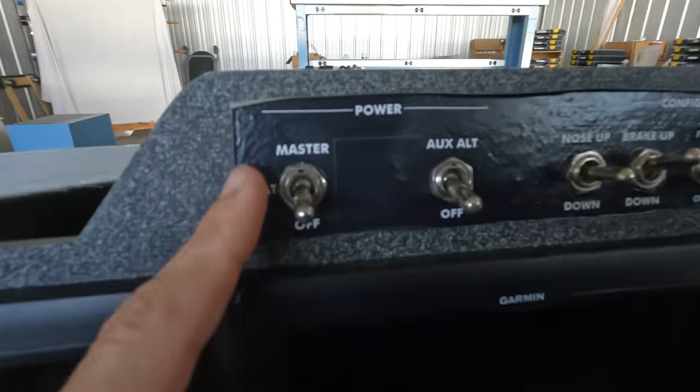Another option you have is to get with a local sign shop and design yourself some vinyl stick-on to add graphics to your panel. This is what I did 5 years ago, and it worked okay. The problem is that vinyl stuff isn't designed to last longer than a few years. Mine started peeling up at the edge, and it started to look pretty rough. Also, when I went to change the design, it was easier just to print with a label maker. So then I had this mismatch of duct tape, label maker, curling up vinyl graphics.

Gross. Okay. Another option you have, obviously, is to use a label maker. These are nice. It's inexpensive. It's easy to iterate. The labels are surprisingly durable. I've had those labels in a hot cockpit for over 5 years, and they look just like I put them in. They look like trash, but they still look just like I put them in.

So the downside with those is that they don't look good, and passengers, I think, kind of get an idea for what their experience is about to be based on how well your aircraft looks. You know what I'm saying? Aesthetics matter to the extent that you want your passengers to feel safe and secure, and that they didn't just get into an experimental race plane that some guy just built in his garage. I mean, that's the truth, but if you polished it up a little bit, then maybe they wouldn't think that.

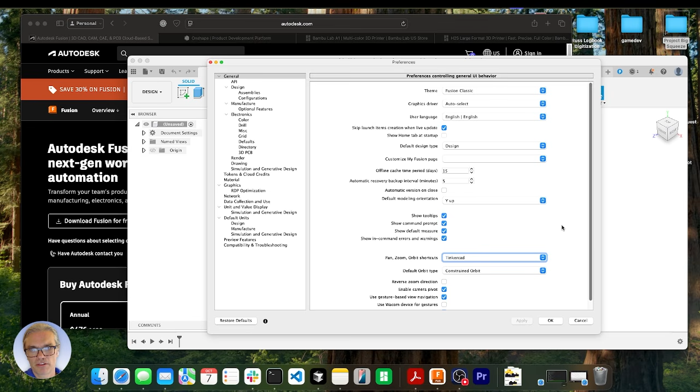Oh, what's the name of it? Bambu Studio, the thing that we're going to use to input our 3D file into the printer. So change this to Tinkercad, hit OK.

All right, so what we're looking at here is we are currently in the 3D space. There's nothing to look at, so let's go ahead and create an object, and then I'll show you the rest of the UI. Everything in CAD is basically a two-step process.

Step one is to create a sketch, like a 2D sketch. We're just going to draw a shape onto a 2D surface. Then we are going to what they call extrude the surface of that 2D shape into some 3D dimension. If that's confusing, don't worry, it'll make a lot of sense here in a second.

So on the bar on top, right here where it says create sketch, we're going to click that. Okay, and so now what it's showing us is the three different dimensions that we have to work with here. Green is vertical, red is X, and blue is out of the page, so that's Z.

We are currently looking at our work surface from the front right top side, okay? So this is the view cube. It sort of gives us an orientation in space for how we're looking at the X, Y, and Z origin point.

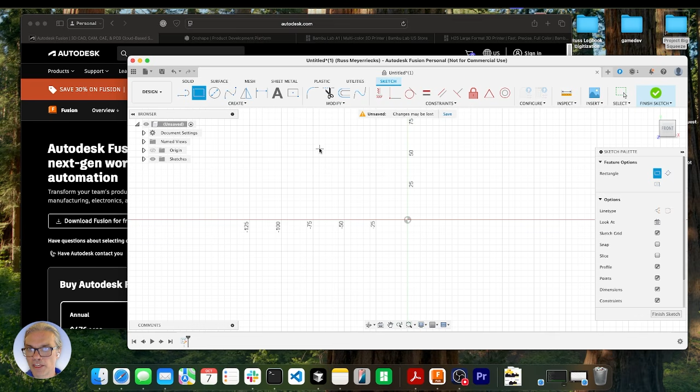So what I'm going to do here is just draw a quick rectangle. I'll click on the rectangle button, click once to start the rectangle, and then click a second time to stop the rectangle. I think that's good for now, and then we'll go ahead and click Finish Sketch.

Now, when you do that, it brings you back out from the 2D sketch space to the 3D space, okay? And it reoriented your view to the home view, which is that same view we had earlier, sort of halfway between front, right side, and top side. So you can click this little home thing and it always brings you back.

Now, if you click front, it puts you front and center, because that's how we had aligned our original sketch. Okay, this is the square that we drew. So I'm going to go back to the home view.

Now here's the second step for CAD. The second step is to extrude the surface that you just created from the sketch. So here's the extrude button in the top left, I'm going to click that. It auto selects the surface because it just kind of figures out what we're working with, and then it asks us what distance we want to extrude that surface to.

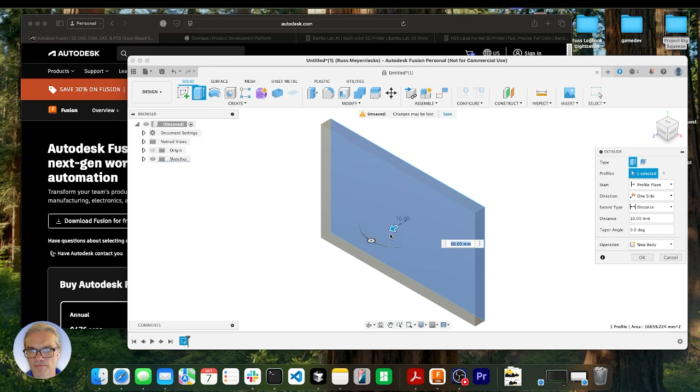So instead of entering a distance, I'm just going to grab this arrow and drag it out. See how we can make it thicker or thinner, easy peasy. We're just going to make it 10 millimeters for now, hit OK, and look at that, we have a 3D object that we created from a sketch and then extruded.

Pretty easy. Now if we hold down the right mouse button, we go into an orbit mode and we can orbit around the part. We kind of have to catch the shadows here so we see where our angles are, but see how the view cube in the upper right hand corner is orbiting with us? This is a good way to move your viewpoint if you wanted to see something very specific. Now I let go of the right mouse button.

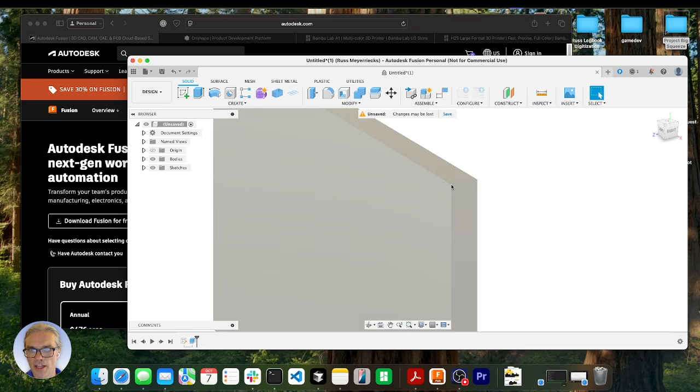And then another thing I can do is use the scroll wheel to scroll in and out, that zooms us in and out, okay? So right click to orbit, scroll wheel to scroll in and out.

Now that we have something on the screen to talk about, let's review the rest of the interface here. An important drop down on the browser on the left-hand side is sketches. The Sketch1 is the original sketch that we created earlier. Now, you see how there's an eyeball here, but it's X'd out?

When you consume a sketch for an extrude, the program will hide that sketch from you. You can do multiple extrudes from a single sketch, but you'll need to come in here and unhide it so you can select different surfaces to do more extrudes.

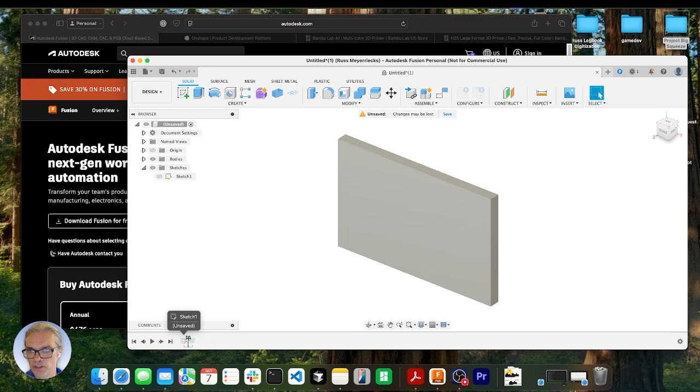Another thing to look at is down here on the left - this is the history. It shows that it started with a sketch, then we did an extrude, and any other operations will continue on to the right. You can grab this little marker and undo the past few operations, like if you needed to go back a step and change something.

But it's even smarter than that. Check this out - if I go back to our original sketch and double click it, it brings us back to our original sketch. Let me make a slight modification to this sketch.

I want to add a fillet to one corner. I'm going to click the fillet tool here, and then define two surfaces on which it is going to fillet. Now it wants to know the radius of the fillet arc. I'm going to give it a big arc here, just so it's really obvious.

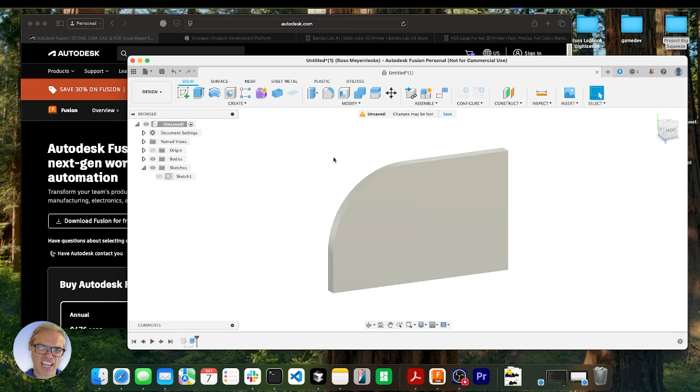And then click Finish Sketch. Now you see what happened - it updated the sketch in history, and then cascaded that change through the extrusion. You'll find this to be true for many steps. So if you have a well-defined sketch on step one, this is just my experience, and then a handful of extrusions, which we'll end up doing because a lot of the text and edges get extruded in multiple steps, then you have the ability to simply go back to your original sketch, change the text, and everything updates all of the extrusions all the way down the line. It's pretty clever.

This pretty much concludes the UI walkthrough. Now we need to get started on an actual instrument panel label.

Here's what I'm thinking we do for an instrument panel label - let's do a three switch label, and we'll just come up with some fake dimensions because in your particular case, you're going to have very specific dimensions to work off of. If you don't already know the dimensions of your instrument panel, I'd suggest you take something like a pair of calipers or a measuring tape and go out and measure things like the critical dimension, which is the hole spacing.

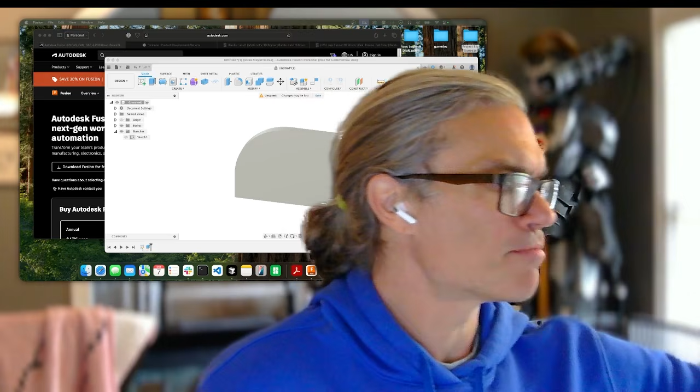So here's an example of my instrument panel label. I happen to install my switches on 1 inch hole spacing. You will also need to know the size of the switch punch through - how big the switch hole needs to be. Those two things are critical.

Less critical is the amount of space that you have around your switches. So how large you make the outline is pretty much determined by what you think looks good aesthetically, and the room that you have maybe running up against other switches or fuses or something. So go collect some of those dimensions if you don't have them, and then let's get started on creating your own instrument panel label.

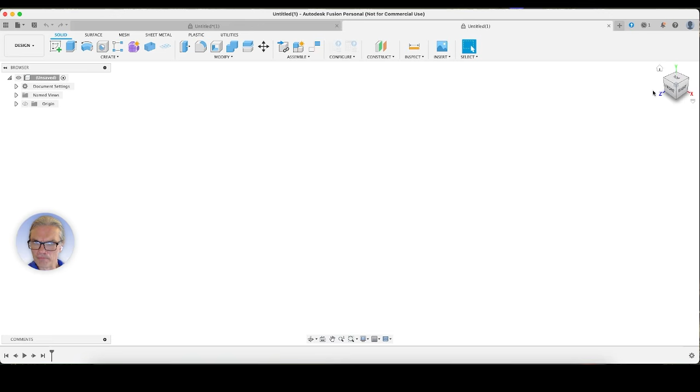I'm going to click the plus, the new design over here on the right hand side. I will click create sketch. I like for my sketches to be on the XY plane, so let's see - green is Y, and red is X. I'm going to click the XY plane here. Now we're in sketch mode.

Now, there are two tools you're going to need for this process that it would be beneficial to have up here. By default, they are not. So we're going to click Create - this drop down has more tools than there are icons up here on the top. We're going to go to Rectangle, Center Rectangle, and then on this little three dot menu on the right, click that, and then click Pin to Toolbar to put it up here.

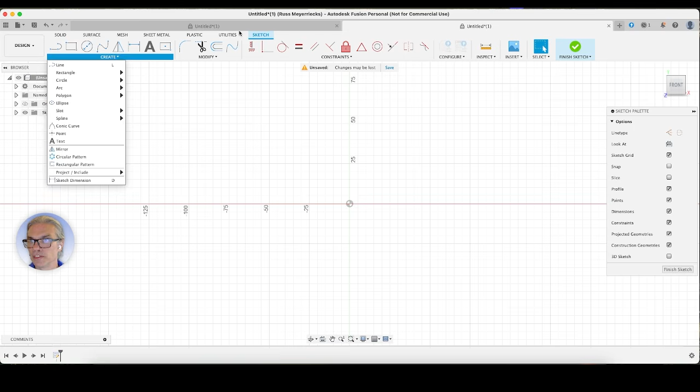Then you're going to come back in and do the same thing for the text tool, because we use these tools a lot in this process. Okay, once that's done, let's go ahead and create a center rectangle here.

So I clicked on the origin point here in the middle, and then I just drag one corner out here and then click. The dimensions for now don't really matter. We can adjust those a little bit later.

Now, we happen to know that our switches are on 1 inch centers. So it's desirable to create some construction lines in order for us to place those switches as evenly and accurately as possible. So what I'm going to do is create three construction lines that are 1 inch apart, and then I'll put the middle one right here on origin.

So let's come up here and go to line. And then on the right hand side, under Sketch Palette options, see where it says line type. We're going to click the construction toggle.

So whenever this is toggled on, you're creating this dashed line, which is used for dimensioning objects and aligning things, but does not count as an edge for the purposes of defining shapes to extrude. Maybe that's overly complicated, but we use construction lines to align things, just remember that.

So I'm going to start up here. And if I hover over the vertical dimension, the Y dimension, the plus sort of snaps to it. So I'm going to click once to start the line there, and then I'm just going to drag it straight down, snap to that green line, and then click again.

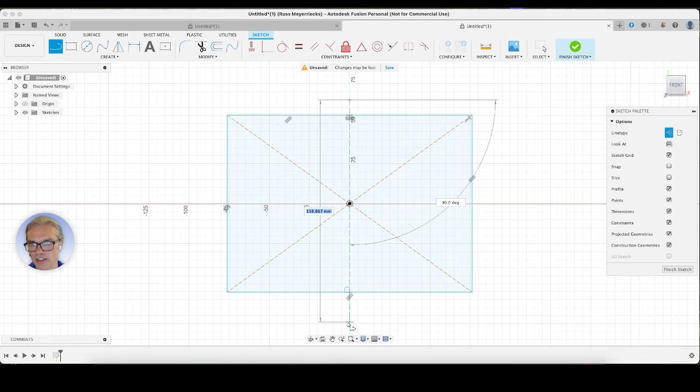Now to get out of this, you can either click this plus check mark, or you can just hit escape on the keyboard. So I've made one line.

I'm going to come some dimension out here, and then I'm going to make a second line. And then hit L if you want a shortcut, and create a third line here. I guess if you click plus, it keeps you in the tool, and if you hit escape, it takes you out of the tool. So I guess that's something we just learned together.

Now what I want to do is make sure that these vertical lines are on 1 inch centers. So I want the center line to not move at all, so I'm going to click lock. I don't want it to go anywhere. So now if you grab it, you can't grab it and move it around. It's frozen in space.

And then we want to call dimension. So everything here under constraints basically tells the program how far away something should be from something else. So the most simple one we're going to do is distance dimension. I'm going to hit D.

Which I guess is over here. And then I'm going to click the middle line, and I will click the right line. And so now it's telling us it's currently 34 millimeters.

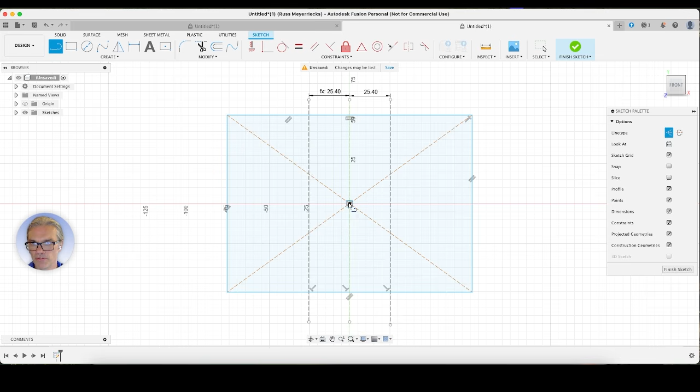I'm going to hit L as a shortcut, or you could click the upper left-hand tool here. I'm going to start from the origin. If you hover over something that can be used as a reference, and then move in a direction, it will tend to snap to that thing. So if I start at the origin point and come out to the left, it's going to give me a constraint that holds it to the origin point, which is what I want. So I click once, go all the way out to the right, and click again. Then I'll hit escape.

So now we have a line here that defines the horizontal dimension. I'm going to click that, and click lock because I don't want that to go anywhere. There are other ways of doing constraints, lots of ways. I just happen to do it this way.

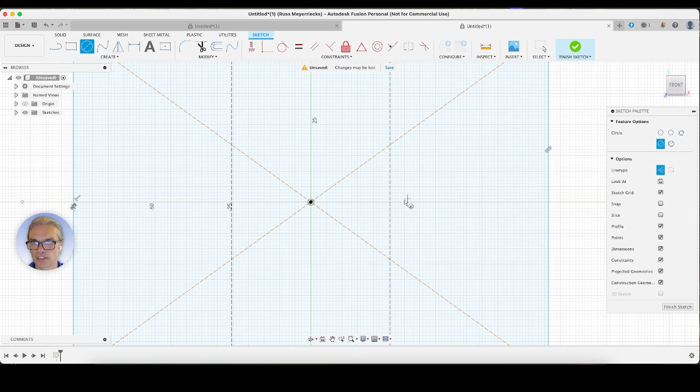So now we have the intersection of this line and the horizontal line, all defining points we can draw holes on. Let's go ahead and create a center diameter circle, third from the left up here on top. And then I'm going to let it snap. Actually, let's go ahead and do the origin point. And I'll just click some. Oops, okay, so here's where I messed up.

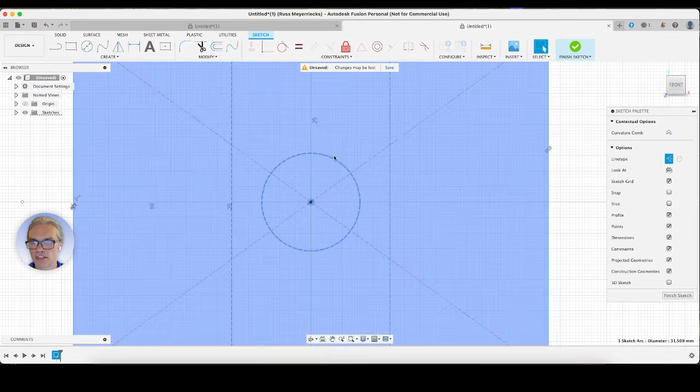Now I created a construction line for the circle, but I don't want it to be a construction line because this is going to define part of the 3D geometry. So I'm going to double click this line, come over here to the right where it says construction, and untoggle it. So now it's a real line. See how when I hover over it, it changes what can be selected.

Now, if you looked earlier, you would see that the hole size was wrong. So let's go ahead and dimension the hole. Click Sketch Dimension, then click the outer edge of the circle, drag something out, and click again. So it thinks it's 31 millimeters.

Now, I know that's not correct for my switches. I happen to have one of my switches here. This is a BNC switch. And if you've got one too, we will find out what exactly the dimension is here. This is how I find dimensions, using this cheap pair of calipers. You just use the calipers to find out what the thread width is. So I've got 11.8 millimeters or so.

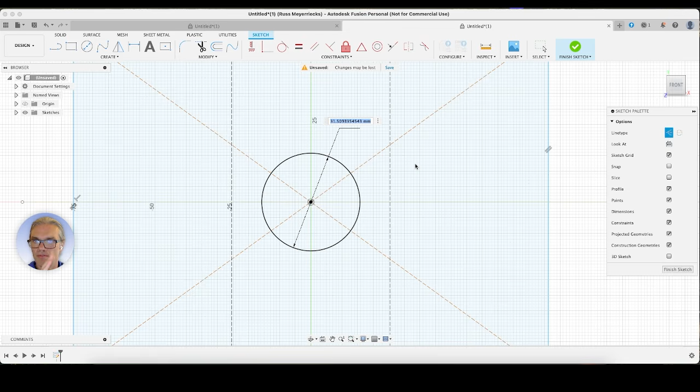So here's another thing in 3D print design: you never want to make a dimension that fits a physical object the exact same dimension that you measure. You need to add a little bit of tolerance. So I'm going to guesstimate 12 millimeters is probably my huckleberry. If this doesn't work, the 3D printed part is like $2, and you just iterate, print another one. Pretty easy. And in fact, these instrument panel labels print pretty quick, only like an hour and a half, 2 hours at most, depending on how big it is.

So we've got one circle. This is perfect, exactly what I want. I'm going to create two more. Hit circle - this is the one to the right on the 1 inch center. Oh, see how on the right-hand side I had construction line. I'm going to untoggle this so the next two circles don't have the same problem. So I'm going to define a circle here and a circle here.

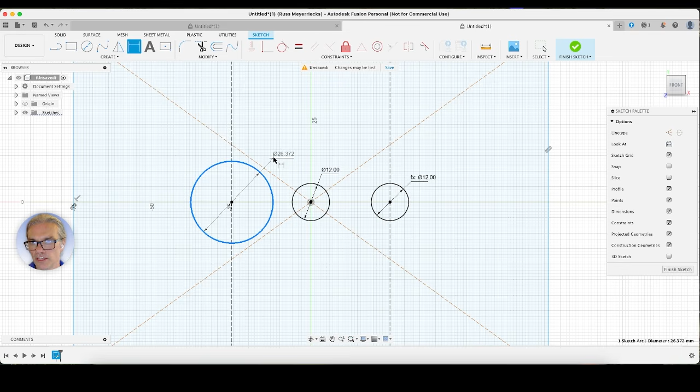Then I'm going to hit D or click Sketch Dimension, and we're going to make this the same size as this guy. To repeat that process, you click dimension, click the edge of the circle, click again to put the label for the dimension, and then click the other dimension label for the thing you want to copy. So I'm going to copy this guy - D3, I guess, is the value for that label. Then hit enter, boom. Now we've got three circles all the same size. Now, if you print this out and have a problem, all you have to do is come back to this sketch.

With the pointer, double click this dimension. 12 millimeters wasn't wide enough, there wasn't enough clearance there, so let's make it 13. Hit enter, and boom, look, the other circle updates as well. Okay, I'm going to stick with 12 though.

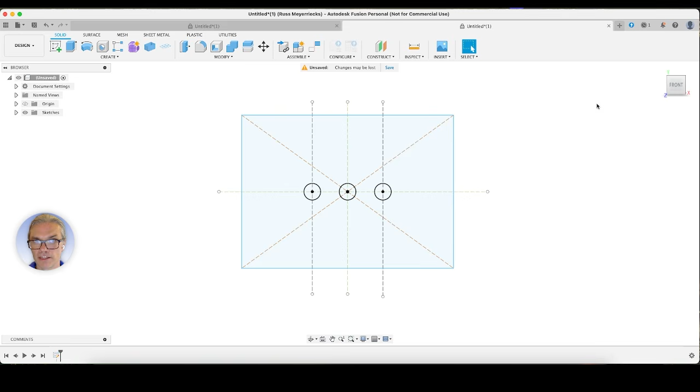So now what we have here is sort of like a rectangle, an outer dimension rectangle, with three circles in the middle. Just to get your bearings, I'm going to click Finish Sketch, then the Home button, so we can see what it looks like when we extrude it. If I click Extrude, select the surface, and bring it out 1 millimeter, we've created a 3D object that's 1 millimeter thick with three holes for switches on 1 inch centers. Does that make sense?

Perfect. So I'm going to go back to the sketch. What I did was, on the left-hand side under the browser, I clicked the sketch dropdown, and then I just double clicked this thing that says Sketch One.

And we could change this name too. If you click the sketch thing twice, we could do like, I don't know, three switch sketch or something. I don't know, I'm terrible at naming things. Actually, I got a better name: Sketchy McSketchFace, there we go. How original. Way to go, Russ.

All right, so now what we need to do is add some labels. This is the fun part, in my opinion.

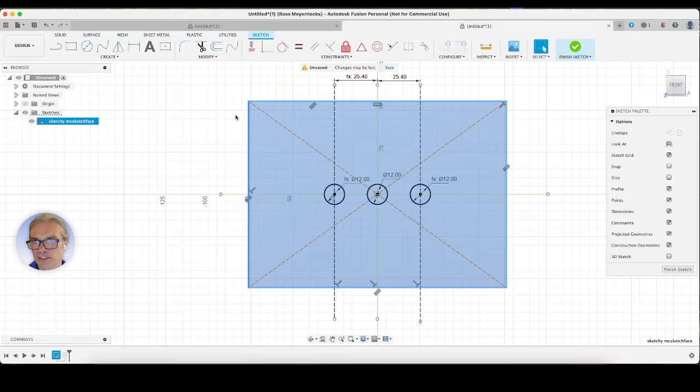So we're going to click the text tool, and if you didn't bring this out, you've got to click Create. Actually, I'll go ahead and do this and show you a trick I came up with, but it requires reorganizing your thoughts on it, okay? For some reason, in the Fusion text tool, the dimensions of the box that the text is going to go into are determined by a 2-point rectangle. So if I click once, it gives me sort of like a 2-point rectangle, and then I click again, and that's what it wants to constrain the text to.

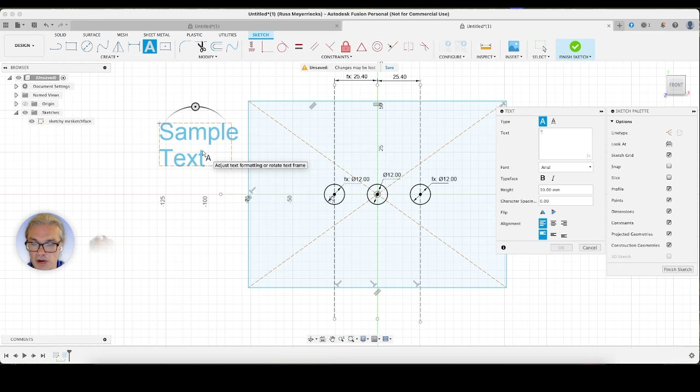Now the problem I ran into was, let's say, chem trails -- let's say I want to center this text, right? Well, it turns out there's no way to center this box on anything. I could move this box and put a specific point to define where the upper left or lower right point of the box goes, but that doesn't help us out at all, does it? For instrument panel labels, you want the dead center of the text to be aligned with the dead center of all the other text, right?

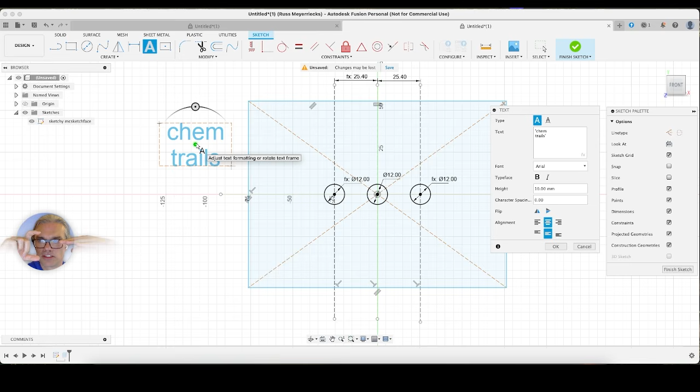So here's how I figured out how to do this. First, within the dialog box for setting the text, we can make the text align center, left and right, and align in the middle, up and down. That's what these two alignments do. So that means if we can define a center point of this rectangle, then define points where the centers need to go, we know that vertically, the text will be aligned center with the switch hole itself, and horizontally, the text will be aligned with each other. If it's a single line of text, they'll be exactly the same. If it's a double line text, the center of mass, so to speak, will be aligned as well, which I think is proper -- you might have different ideas about how to align it.

So you're welcome to just do your own thing, I guess. I don't even know why you're watching this video.

Anyway, I'm going to go ahead and change the font here. I happen to like Futura, let's see if I can find it -- A, B, C, D, E, F. Bold -- well, maybe not bold. I definitely want it to be capital. The thing with the text box here is Fusion for some reason wants you to enclose the text you want to use in single quotes. If you get rid of the single quotes, it doesn't work -- I don't really know why that's the case, but I'm going to capitalize mine.

Boom. So now we're centered vertically, centered horizontally, and capitalized, which you really want for instrument panel labels. Lowercase doesn't look right, in my opinion—at least none of the panels I've seen use lowercase. I do like bold for Futura, this is a very instrument panel-y style font. It's very close, in my opinion, to what Boeing uses on their instrument panels. If you're interested, look up the Boeing instrument panel process on YouTube—it's pretty fun, pretty fascinating.

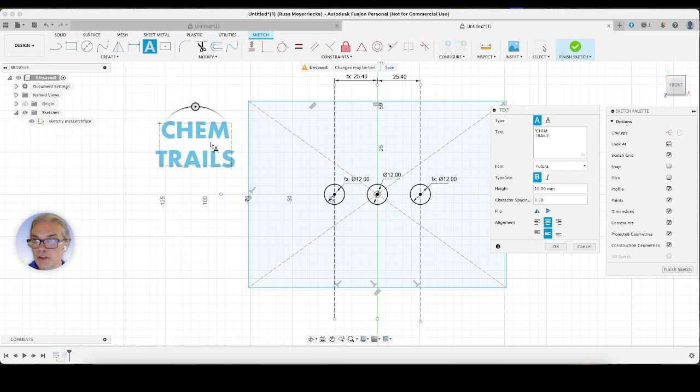Okay, but the problem is we're going to have to rewire our brains here. If I click OK, I don't have a way to define the center point of this—see how it gives me a little dot, but won't let me align that dot properly, it starts to rotate? I have no idea what Fusion was thinking with this. But I figured out a way to get this centered, so I'm going to delete this.

We'll start anew, but first what we're going to do is define the center points for all of our text first. Let's take it easy and say the first thing we want to do is have an off label for each individual switch. So there'll be three off labels, centered and below the switch itself.

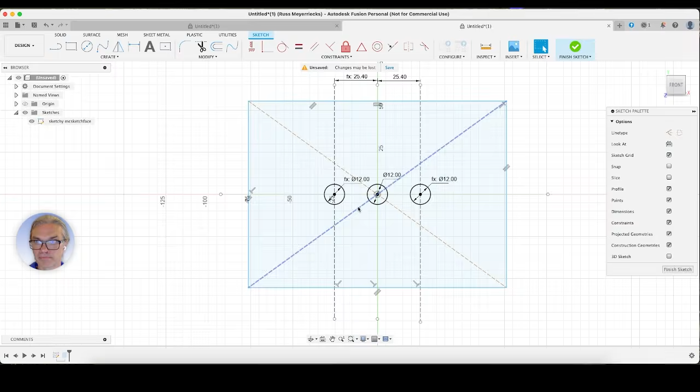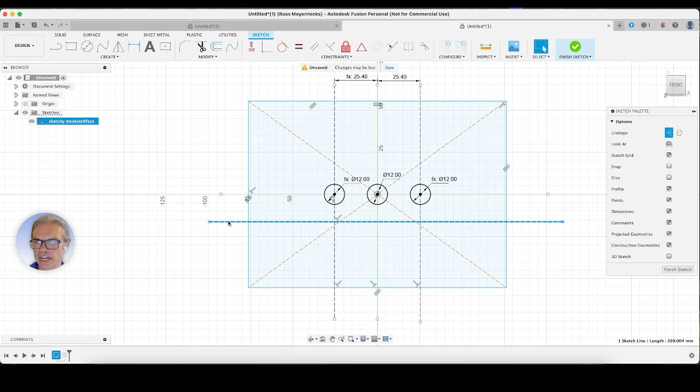So I'm going to first come back to construction mode. I'll click the construction toggle switch, then click the line button. We know that we're going to center up vertically on some line that's below the switches. So I'm going to define a construction line down here. Now, how far away this line ends up being is just kind of preference—honestly I don't remember what I set mine to. There's some trial and error with it, changing the font size and moving the alignment around until you like what you see, so I'm just going to make up a dimension for now.

So I hit D—sorry, I keep using shortcuts—the sketch dimension in the upper left-hand corner. I already have the line selected, and I want to change its dimension from the center point line here. So I'll click that and drag a dimension out. I kind of like even numbers, so maybe 20 millimeters—that looks good to me. Now we have three different intersections down here that we can use to center our off labels.

Now here's where the center rectangle really comes in handy. I'm going to click center rectangle. The way this rectangle works is, starting from an origin, you start creating the rectangle, and wherever you drag, the center of the rectangle will always be centered on that origin. We know that the origin we just created is exactly centered with all the other text in that line and the holes themselves, right? Beautiful. And we're in construction mode, which is what we want, because we're creating a bounding box where we can select the edges when we use the text tool.

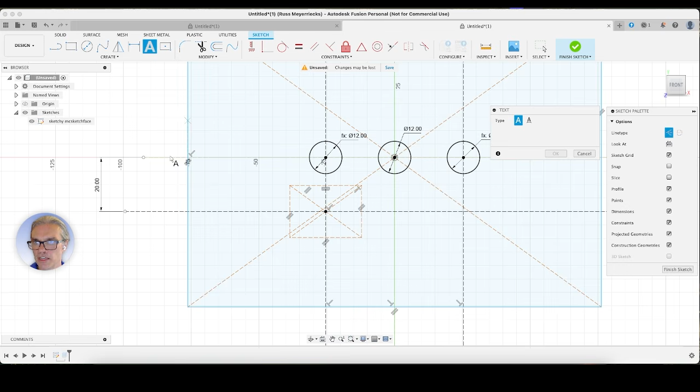So check it out—I'm just going to select OK. Now we have a box that we can use: when I come in here with the text tool, I can select one edge of it, then select the other edge. Now that sample text, as long as the alignment is set to center and aligned in the middle, will always be centered with that one dot. It's lame that we had to go through all this, but it is what it is, I guess.

What do I like for size? Okay, 5 millimeters looks good. And then I'm going to type 'off' and hit OK. Boom. Now that off label is perfectly centered, exactly where we want it, right?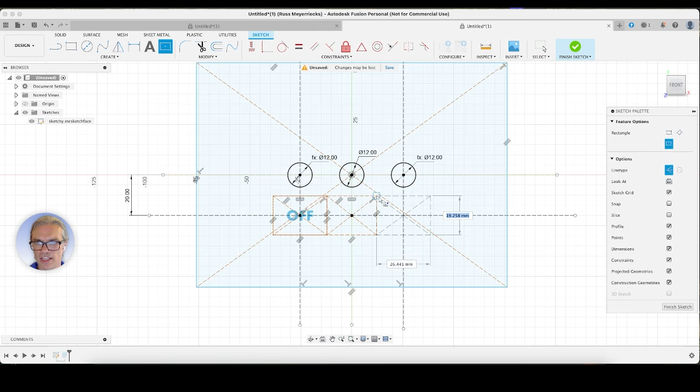Okay, so I'm just going to do this two more times. I'll create a center point rectangle, set it to construction, and then select the next edge, because it doesn't really matter—the text can actually overrun these bounding boxes, so it doesn't exactly matter where they go. Then I'll hit text, go lower right to upper left, and say this is also off. I'll do it one more time, lower right to upper left, and we'll say off. Boom.

Man, that looks good. Perfect. Okay, I was just using the right mouse button here to pan around, so I'm going to click front to go back to front and center.

Now, what are some switches that we typically have? Okay, let me set up the top row first. This is just a repeat of what we keep doing - I'm going to make a line, a horizontal line.

Okay, this is construction. So now where does this go? I need to dimension it, so I'm going to hit D, or select the sketch dimension. It's a dark blue color, so we know it's already selected for that line, but we need to dimension it against something else - I'm going to dimension it against our center line here.

Click that, come back over here, and I'm just going to make it the same. I'm going to click on this 20 millimeter dimension - I guess that's D10, right? So these are the same.

So if you come back in here in the future and you decide you need a few more millimeters between the switch and the label, you can move one and it'll move both. That might not be what you actually want, but we'll go with it in this case. It's easy to change.

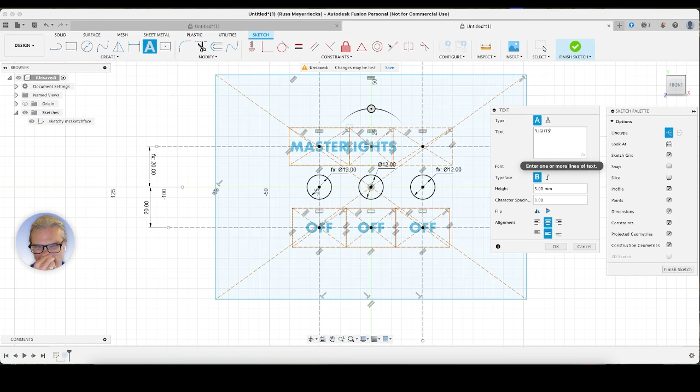All right, I already see a problem, but we'll roll with it for now. Lower right to upper left, and we'll do a two level text here, so I can show you how I handle that as well. So we'll do Chem Trails.

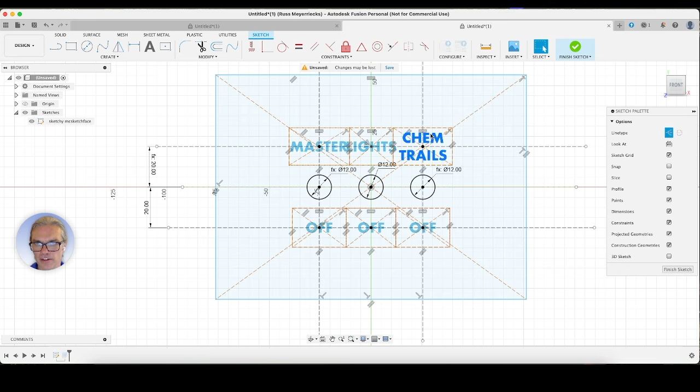Okay, see how everything is nicely aligned, left to right, up to down. Even Chemtrails is sort of aligned with the other text. Now, this might not be what you want - maybe you want 'trails' to be aligned properly with these over here, and you can achieve that just by moving this around. It doesn't need to be exactly on this bounding box. Or you can just not do the bounding box altogether.

But one thing I'm noticing here is that we have actually made our font much too large, because I happen to know that on 1 inch centers there's plenty of room to fit all this text, and we're running into a problem here. So what I'm going to do is hover over master, double click it, and make this 3.5. I knew I remembered that number from somewhere.

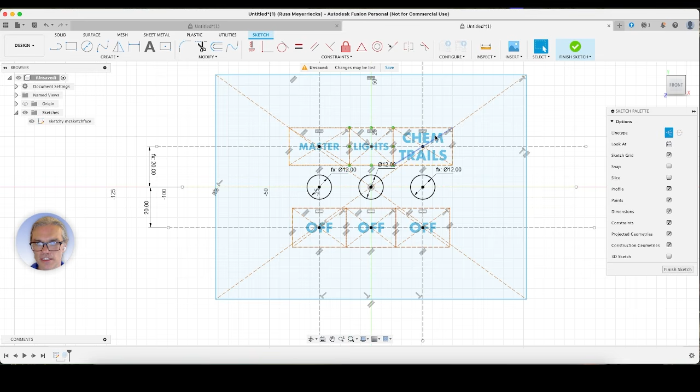Okay, hit OK, and then I'm going to do that for the rest of these. Again, this is an iterative process, and you might have a smaller or larger panel than I do, so it might not necessarily be that you like all the dimensions that I like. But the key is just to play around with it - that's why this process is so great. You can iterate so quickly.

You're not locked in, like imagine designing all this and then spending $1,000 to get it laser etched on an aluminum instrument panel, getting it in, and hating the font size or something not quite aligned. Oh, that stinks.

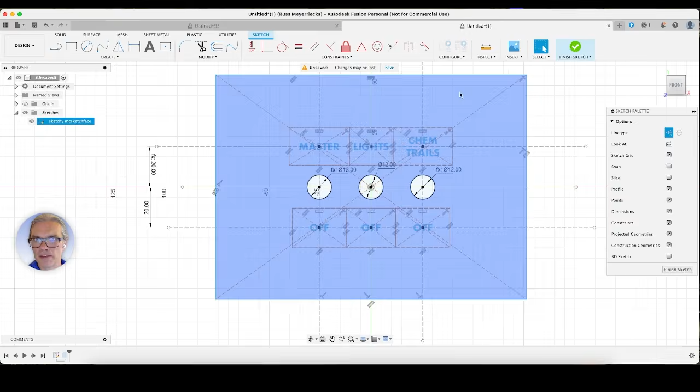Okay, so for this outer bounding box, I probably should have done this last just to keep this thing from flashing over and over. We can still change the dimensions because we did not... Oh no! Oh, look how it's rotating my text. Ugh, why would it do that? I bet somehow this bounding box is attached to...

How is it attached? That is wild.

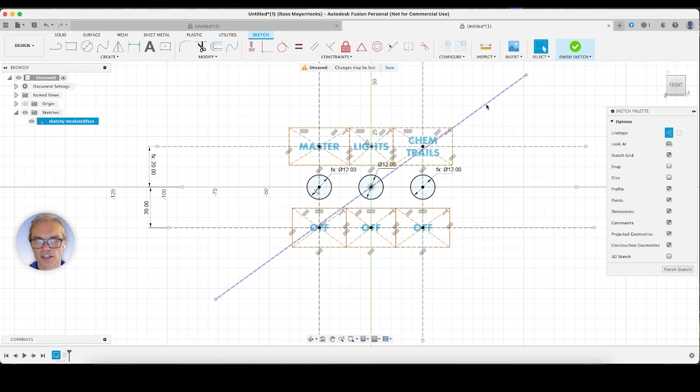Okay, well, that should be an easy fix. I'm going to undo that. I'm going to double click the outer rectangle and hit delete. Now we don't have that rectangle anymore, so we'll just create a new one. New rectangle. Actually, we need to delete the construction lines for it as well. Then I'm just going to create a 2-point rectangle so I don't mess with any of the other dimensions, and kind of come around here.

Oh, and I messed up again. This needs to be a not construction line. Okay, sweet. So let's kind of suck this in a little bit here. I guess it doesn't need to be that big. So I'm just going to kind of grab these edges and bring them in here. That looks good.

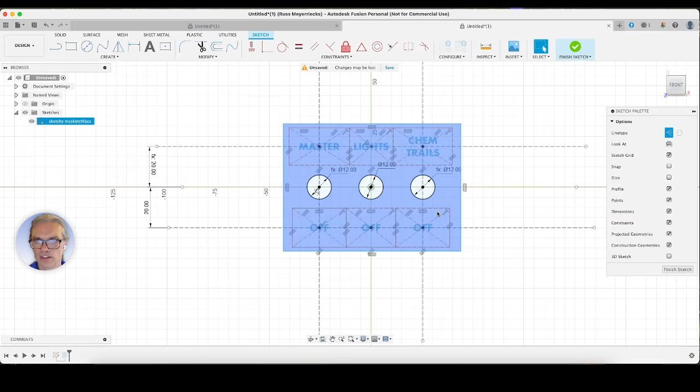Okay, so let's go ahead and finish our sketch and see what we're working with here. See how it updated the sketch dimensions? Now the outside that we had extruded earlier is still, everything looks good, right? We've got our 3 holes, we've got an outside surface.

Now here is where we need to work on the font, okay? So I'm going to unhide the sketch. We already have one extrusion, and that's the base. So I'm gonna expand bodies here. Body one is gonna be the base plate at 1 millimeter, right? So I'm just gonna name this base plate to make things easier on us in the future.

So what is gonna eventually happen here is the text itself gets extruded as its own body. Then when we export it as a 3MF file, each text body becomes an object in Bambu Studio. And Bambu Studio can color objects individually. So we will use Bambu Studio to paint the text body in whatever color we want. For example, the base plate will end up being black, and then each individual text body will be white.

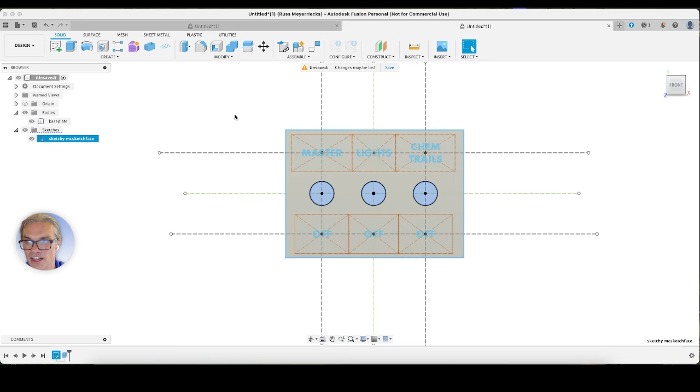To get there from here, what we're going to need to do is use the text surface itself to cut a text shape hole in the base plate. Then step two is going to be to extrude the text surface itself into its own individual bodies. This one took me a while to figure out. You cannot just extrude the text as its own object inside of the base plate that doesn't have the hole in it, because Bambu Studio uses the hole to align the object. So apparently it just gets like a jumbled collection of objects in the 3MF file, and then it auto determines where those objects should go. So there needs to be a hole first before you can create the text object itself.

So let's get started. The first thing that we need to do is create a new extrusion, okay? And then we are going to come in here and select, let's hide the base plate for now. To do that, you come over here to base plate and click the eyeball sign. So we want to come in here and highlight the text so that it becomes dark blue, okay?

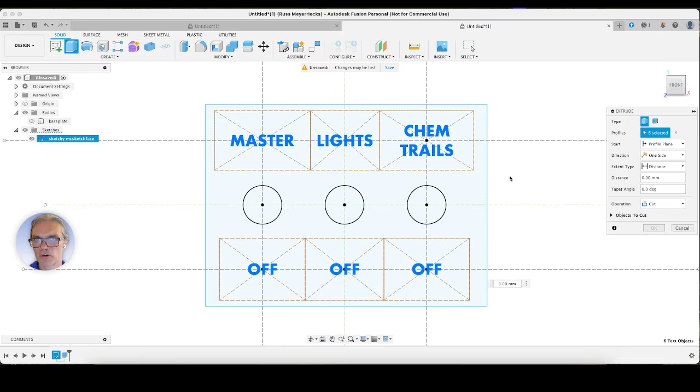So off, off, off. We can see in the extrude menu here, we've got 6 things selected. We are starting from, I guess, profile plane. Click front here again. And instead of a new body, we want to do a cut. In order to cut, we have to re-show the base plate, or else it'll complain at us. And then objects to cut probably already knows, but yeah, base plate. There you go. Okay, so see how it's red?

Let me see if I can zoom in here. See how it's red and sort of goes through the body itself? That's exactly what we want. Okay, so hit OK.

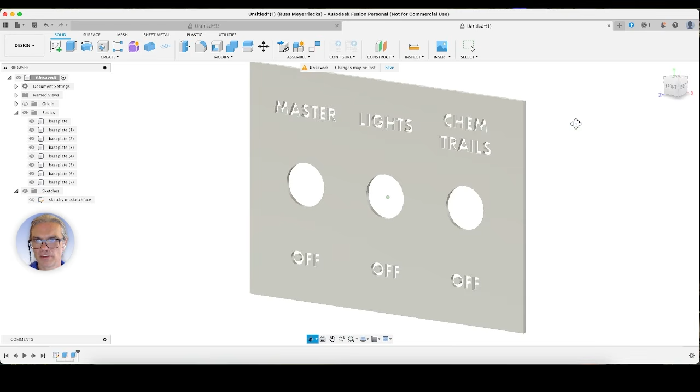And then I'm going to click home, so we're in the home view. Let's click front and sort of zoom in. I'm going to use the mouse wheel to zoom in. Let's hide sketchy mcsketchface and then sort of inspect what we have here. So now we can see we have the base plate with the original holes, and we have cut text shape holes into the base plate. Perfect. So let's reset our view. I'll go back home, click front.

Now what we need to do is re-extrude the text into its own object, right? So I'm going to unhide the sketch, because we need to be able to select it to do the extrude. I'm going to click extrude, and then I am going to hide the base plate and select each individual text.

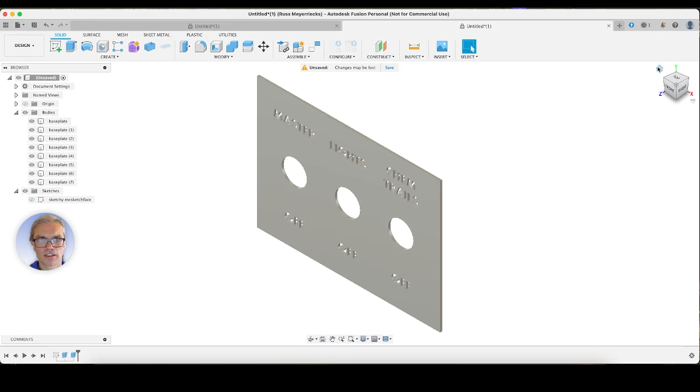Wait a minute, I think something might have gone wrong here. Let me hit cancel, let's hide the sketch. Did the inside... oh, that worked. That worked, okay. Nope, fake news. Let me reset my view.

Unhide the sketch, I'm going to click extrude. See what's happening here is it's trying to select the body instead of the sketch surface. So by hiding the base plate, it just allows you to select the right thing. Just one of those quirks you got to figure out. So I'm going to select off.

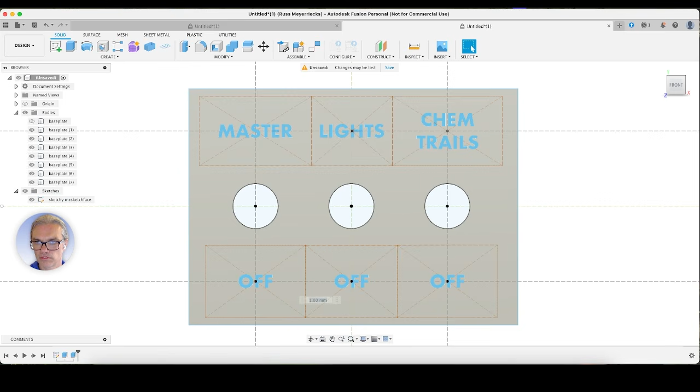Oh okay, hit escape, and that sort of messed with me. Okay, so I'm gonna hit extrude again. Somehow escape, somehow baseplate came back. Okay, let's reset. If you get into trouble, if you have a problem, try your best not to get frustrated because it can be very frustrating software. Just know that you can keep playing around with things. Sometimes you have to hide layers and bodies, and you'll get there eventually.

Sometimes a lot of these things, even what seems like a very simple operation, like what we're doing, which is extruding text, or even aligning text in the right spot, can be overly complicated. But just take it bite-sized chunks at a time. If you built an airplane, you already know how to do this, right?

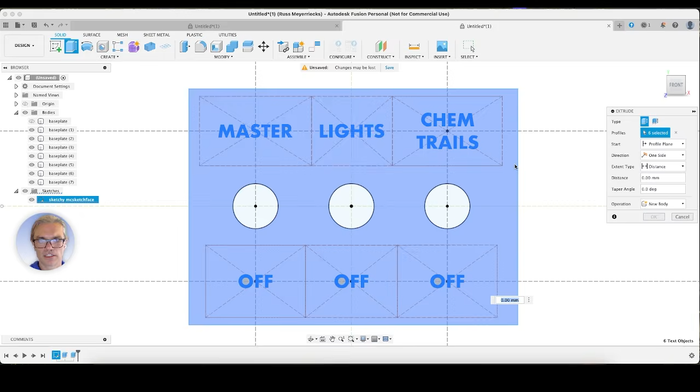Okay, so I'm going to go back to extrude. I'm going to make sure base plate is hidden. I'm going to click each individual text surface. Okay, so for this extrude, we're not going to cut, we're going to create a new body. And we want 1 millimeter, right, because that was the width of our original base plate.

Oh, it just looks weird because the body's not there. Okay, so we can see that just like with the base plate, now we have a three-dimensional thing from the text, right? Now what it's going to do is automatically switch this operation to a join because you're extruding into another object. We do not want to do that, we want to change this to new body. Okay, so each one of these text pieces will get its own body.

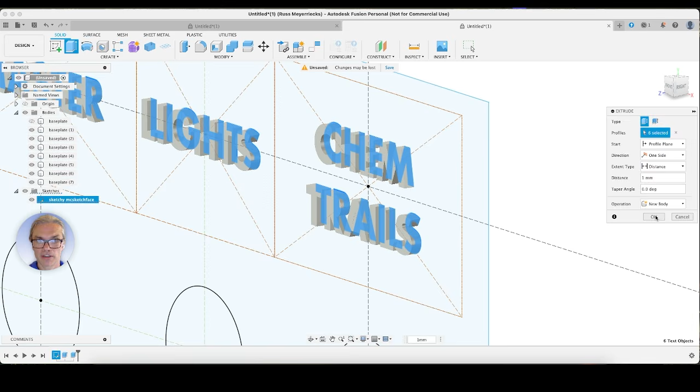That's important because when we export it, we want those to be listed separately in Bambu Studio so that we can color it properly. Okay, so we're going to hit OK, and I'm going to reset the view and re-show the base plate. Okay, so now we basically have a big giant base plate, that's one thing, and then we have these individual bodies, which happens to be the text itself.

Okay, now this is pretty simple. I think we could church it up a little bit and at least add some fillets. So I would like to add some fillets to this sketch just to give it some nice rounded edges. I'm always kind of curious whether it's better to do this in the sketch itself or out here in the 3D space. Let's do the sketch itself.

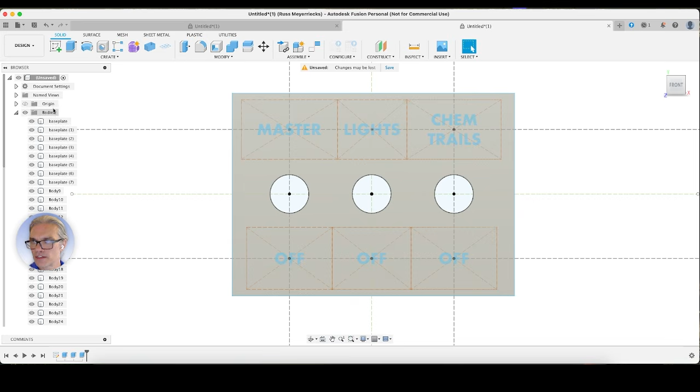So I'm going to close bodies, I'm going to reopen Sketchy McSketchface, and then I'm going to add some fillets here. So to add a fillet, which is just like a rounded over hard edge, it wants you to select two surfaces. Okay, so you can see if I select these two surfaces, it just rounds over this edge and then I can select the radius that it goes.

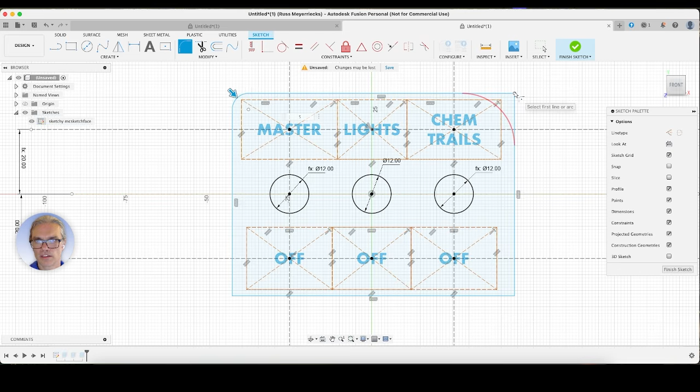So we just kind of want to see what looks good. Maybe 5 millimeters. Okay, but that's not the only surface I want to do. I also want to do this surface, and this one, so they'll all be the same. Well, maybe a little bit more. Gonna drag it, we'll do 6. Hit enter.

Perfect, so we'll do finish sketch. And we can see, even though we've done a few operations, it will carry your change in a sketch forward on those operations. Now, I don't know how to replicate this, but occasionally when you edit an old sketch, it will not do all of the operations. Usually happens when you modify text and then it doesn't know how to select that text for extrusion. It will give you a hint though in the timeline down here on the lower left hand side.

One of these will turn from blue to pink. So then what you do is double click that, and it will bring back up the extrude text box and select all of the things it thinks need to be extruded. Usually you just need to select the new text you changed, so you can go back and heal the process if you changed something in the past.

I think this actually looks pretty good. Let's do one more thing - let's go back to Sketchy McSketchface. I like to have outlines around instrument panels, so I'd like to show you how to use the offset tool. We're going to draw a 1 millimeter outline around this and color that white. So it'll be a black base, a white outline, white text, and we've got 1 inch centers.

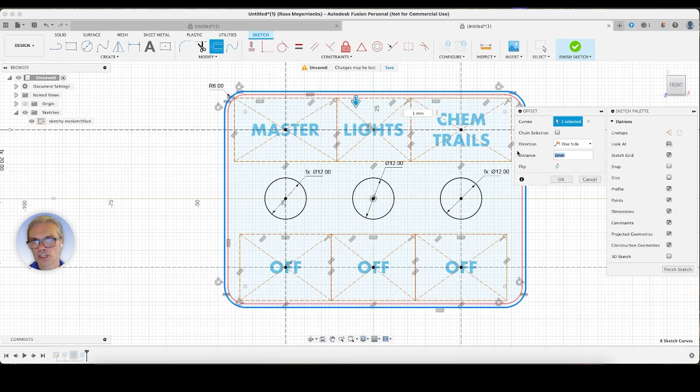Now I want to go 1 millimeter, but actually I think inside would probably be okay. Let's go outside instead. So it wants to go in one direction, I want it to go the other, so I'm going to reverse the direction. Okay, 1 millimeter. You can even do like two sides and whatever, but that's what we'll do for now. So I'm going to hit finish sketch.

So we see the original body here, and now we have a new sketch line on this outside edge. All we need to do is extrude that as its own body, because it needs to be a separate object for us to color it in Bambu Studio. So I'm going to hit extrude, select the new edge, and do 1 millimeter.

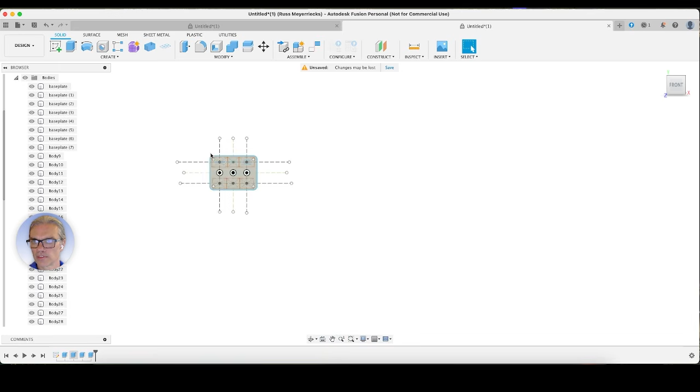So I'm just going to change the name of that real quick. Everything else is text and baseplate, which you could name if you want to, but I don't think it's that necessary. It becomes pretty obvious what you need to color once you're done with the baseplate and the outline.

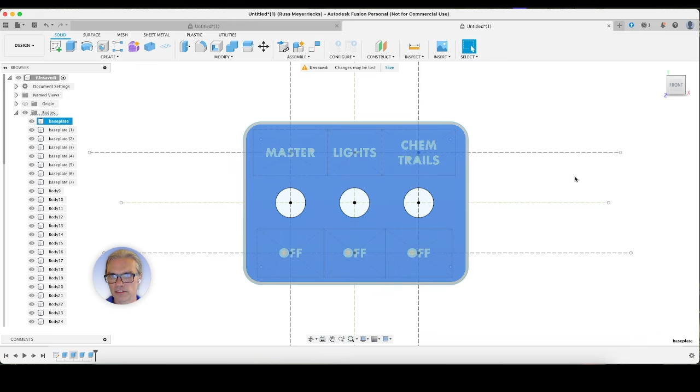Cool, so that's it. We've got ourselves a nice little instrument panel here, 1 inch centers, BNC size holes. We've got 3.5 millimeter high Futura Bold font, and a 1 millimeter outline that we're going to change colors. I think this looks pretty good. I think we're ready for the export.

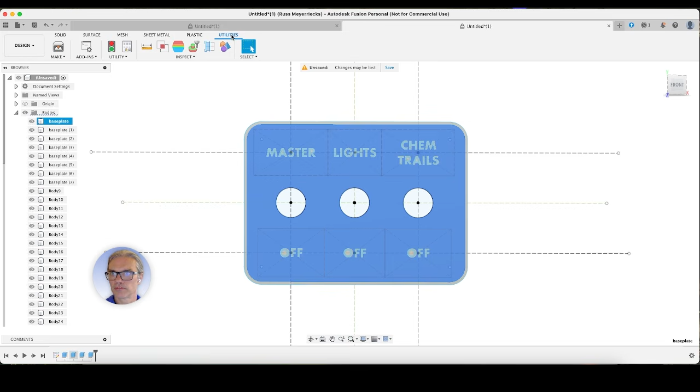Okay, so here are the things you need to know for exporting this file into Bambu Studio. We are going to go to the Utilities menu up here and click the 3D print button - kind of looks like a 3D printer. We want to select all of the objects that we just created. Currently only baseplate is selected, and we don't want that - we want all the bodies.

So the way I found to do it is up here on the drop down menu in the browser where it says bodies, just select bodies with it closed. I think that's right - is that right? One selected. Let's unselect everything and select bodies. There we go, perfect - one selected and it's bodies. It's not very obvious, but if you end up selecting only one thing, it won't export everything.

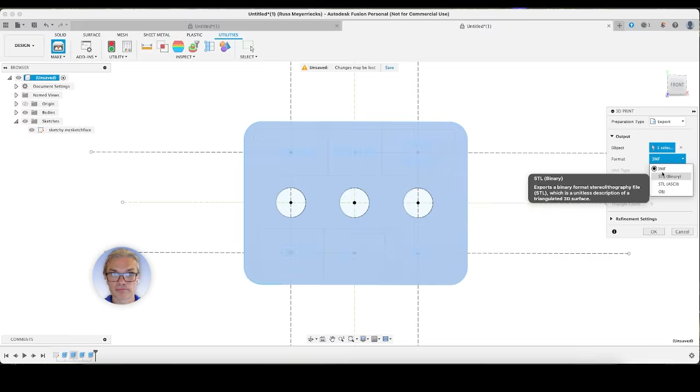So the format that we're going to be doing is 3MF. I don't know if this was invented by Bambu, but they definitely use it as their import format. Now traditionally, when you export something to what we call a slicer - like Bambu Studio, and I'll get into that in a second - when you normally export to a slicer like Cura, it will want an STL. That was the classic file, but an STL does not include all of the information we need in order to color the objects, at least from what I'm aware. So you want this 3MF format. Structure is one file, that's correct. Don't need to preview. Hit OK.

And it'll want you to save it. So we'll do YouTube panel demo.

There was recently a Fusion update, I don't know what that means. So right here is where it saves it. We'll do user, desktop, 3D printer, 3D prints. That works, okay, and we're done with that.

Let's open up Bambu Studio. Well, let's see if we can get it to open up in the right window. Okay, here we go, you can see some of my old work here.

We want to open project, YouTube panel demo, hit open. Okay, here are the options that you want to do. We designed our thing in millimeters, right?

And it's confused. This is a really confusing dialog box. So it thinks it's in inches and wants you to scale it to millimeters, but if you do that, the conversion blows everything up and it doesn't work. So for this dialog box that says, do you want to scale to millimeters, click no.

Okay, and it didn't do it, but sometimes there's a second dialog box that asks, do you want to import as objects? For that second dialog box, you want to click yes if you get it. Otherwise it will spread all your objects all over the build plate, and it'll be super obvious you screwed up. So go back and select yes to the second dialog box option, okay?

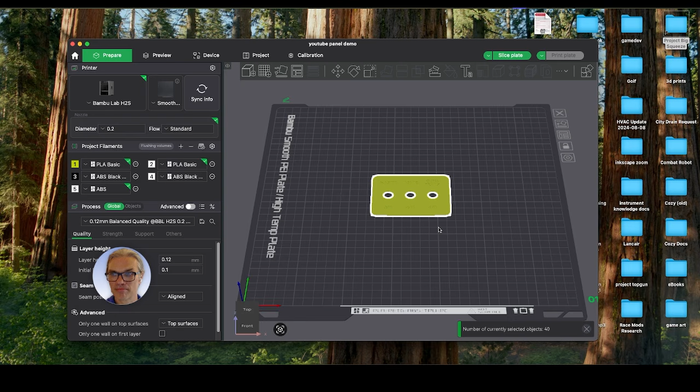Now let's do a quick UI run through for Bambu Studio. Let me make this bigger and find a place to put my head.

To orbit, click with the left mouse button and then rotate it around. To zoom in and out, use the scroll wheel, and to pan left and right, you can use the right mouse button.

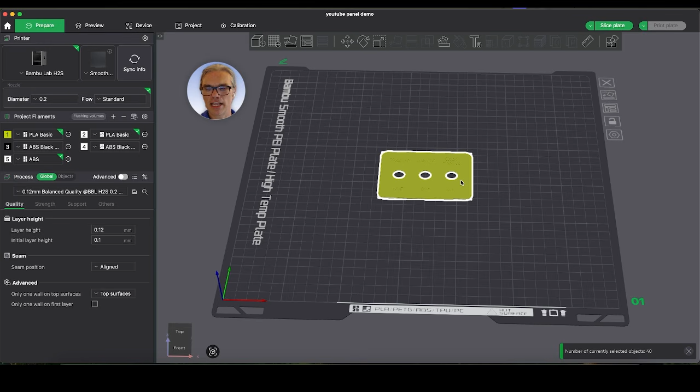Now, when we first load up our project, what we're looking at is a physical representation of the build plate in the 3D printer. When we first load it up, see how in the lower right hand side it says number of currently selected objects? It auto selects all of the objects we just imported. If you hit escape, now nothing is selected.

Now what we're looking at here is, in my case, it just picked one color and painted everything that color. That's not really what we want to do, right? So find an area that's empty and select the base plate, okay?

And I happen to have my filament colors already loaded up, so I have, for example, ABS black. Here's what I want to make the base plate, and it's assigned to number 3. Let me rewind it for a second.

In this middle box here, you are looking at the filaments loaded into your multi-filament system. So I have a lime green PLA, a white PLA, a black ABS, and a white ABS. In this case, for this demo, I'm going to use white and black ABS, and they're assigned numbers. So I have black ABS on number 3, and white ABS on number 4.

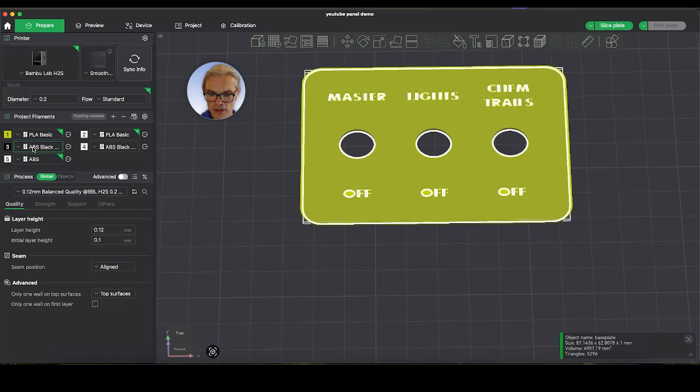Now, since I have just the base plate selected, if I press number 3 -- yeah, I have multiple different filaments loaded, so it's going to give me some warnings. So now the base plate is black and everything else is white.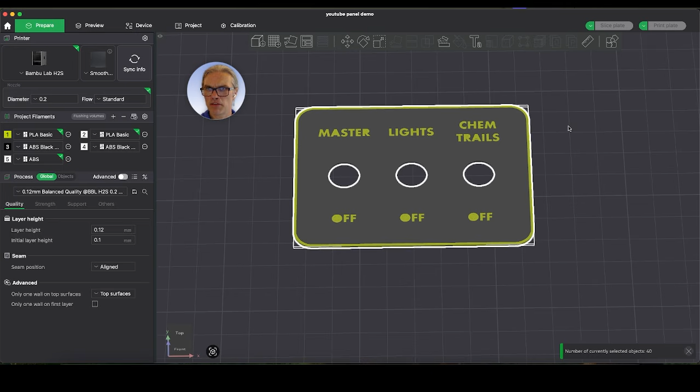Now, generally, what I find the easiest way to do this is to hit Command-A or Control-A, whatever selects all on your computer. See, so we've selected everything. If you don't know how to use shortcuts to select all, I'll show you: up here, if you hold Shift and left mouse click, you have this little rectangle box that you can select. Just hover that over everything to select all again.

Okay, so that Shift left click, just enclose everything, right, and that'll select all objects.

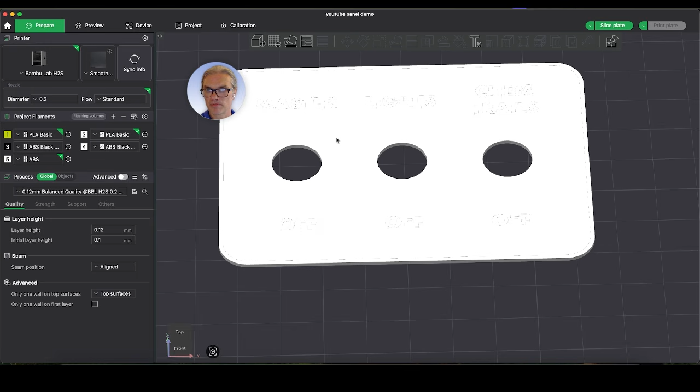So I think I found what makes this easier: instead of individually setting all of the text objects to white, it's easier to make everything white first. So I'm going to select five. Now we've just made everything white, then hit escape to unselect everything. Then select just the base plate with your mouse pointer, and select three, whatever your darker color is. Okay, so that gets us most of the way there.

One issue we're going to have is there are floating layers inside the text. See how the inside of the O is white? These will need to be black. So what we're going to need to do is zoom in, figure out which number your black is. In my case, it's three. Then just select that piece and hit three.

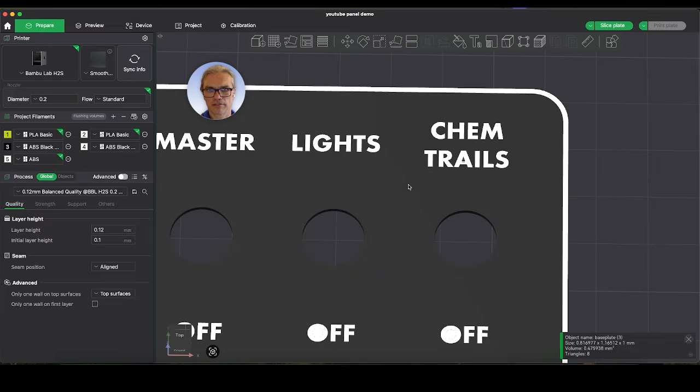So I'm just going to go through here and select everything that's a floating object and hit three. There might be a better way of doing this, but I spent a lot of time trying to figure it out and I never came up with anything. Plus, this only takes a couple seconds.

Perfect, look how good this looks, man. I'm so happy with this. Okay, so we have the white outline. This is going to be, in this case, white ABS. We've got a black base plate and white colors. Awesome. Now there's one more thing we need to do here, and that is flip the whole thing around.

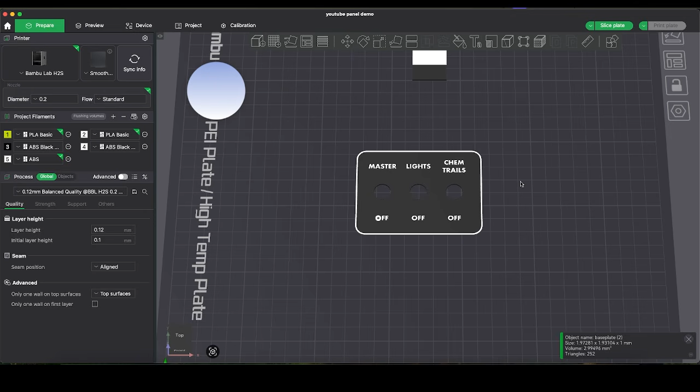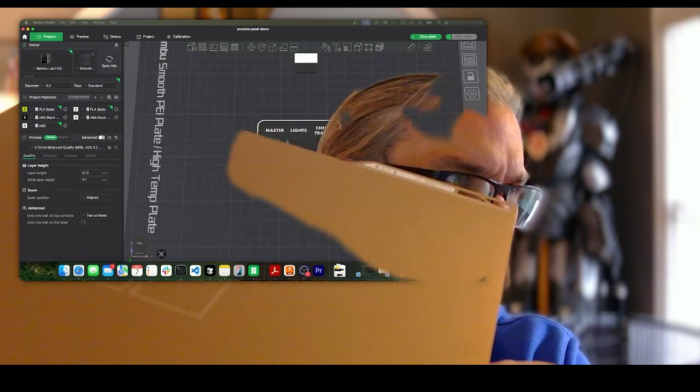One of the things you'll need to do is print on a smooth build plate. For example, what comes with the Bambu printer, this is the default build plate. I don't know if you'll be able to see it on camera, but it has a rough surface, okay?

Now if we print our instrument panel label face down, the face will come out with the rough surface. Now that's actually okay, it looks decent, but it does happen to sort of catch the light a little bit. So if you have no other options, printing it on the rough surface, this is what they call the textured PEI plate. If your filament is giving you trouble, then just go ahead and print it on this build plate.

You're good. In fact, you could probably wet sand it for a couple minutes afterwards. I haven't tried that yet, but I bet that would work just to sort of smooth it out.

If you want to skip a step, you need something called the smooth PEI plate, which looks like this. It's the same plate, but let me see if I can catch the light. It's 100% smooth on it. So the idea is that if you print face down on a smooth surface, you will come out with a smooth front of your instrument panel label.

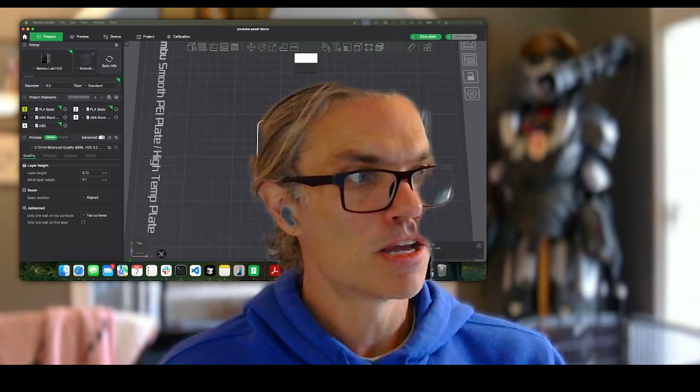But to get there, the first thing we're going to have to do is flip this around, because currently it's printing face up. Now you might ask, well why don't I just print it face up? You can do that. However, I have found that the top surface of a print is always less smooth than either of the other scenarios. So you might even be able to wet sand it again if you want, but we could save ourselves some effort if we just print it face down.

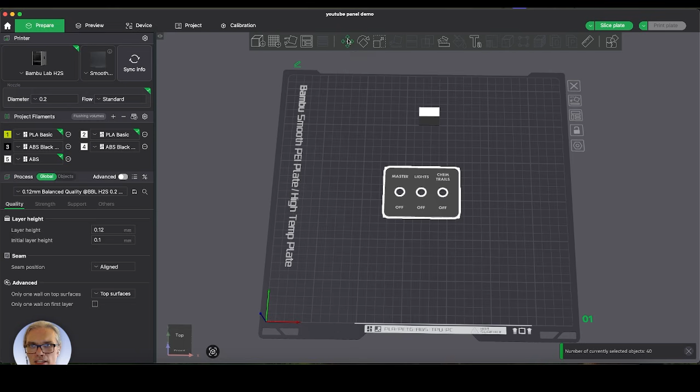Now to do that, we need to rotate the objects in this case to be face down. So let's do the same thing we did earlier where we selected everything — shift click and then drag the rectangle. Then in the upper center left, we're going to click rotate. In the Y dimension, under rotate, I actually don't know the difference between relative and absolute, they seem to do the same thing. In the Y dimension, I'm just going to say give me 180 degrees and then hit enter.

Okay, and then hit escape. So now we can see it prints face down. Perfect. If I grab it with my left mouse button and flip around, we're looking at it from underneath the build plate here. It still looks proper, right? Because we're printing it face down. So I'm going to scroll back around here to the top. Perfect, man, this is going to come out so good. I'm really excited about this.

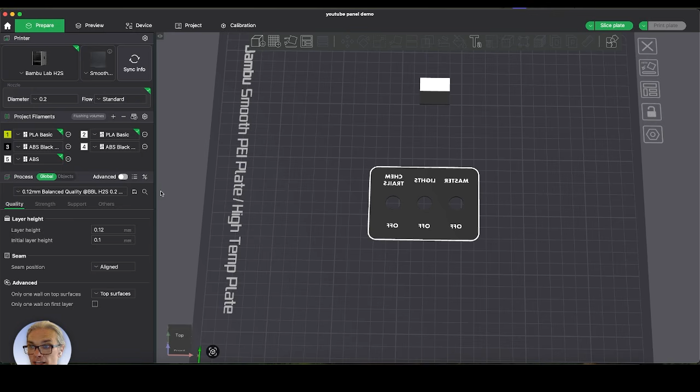Okay, so from here there are some 3D printer settings that you need to know about.

First, to print 3.5 millimeter high text, you really need a nozzle that is 0.2 millimeters. By default, the Bambu nozzles are 0.4 millimeters. You can do panels with 0.4 millimeter nozzles, but you need much larger text. For what you'd expect the size of text to be on an instrument panel, you really do need a 0.2 millimeter nozzle. So throw that in your shopping cart if you're buying a 3D printer - every 3D printer I know has a 0.2 millimeter nozzle option.

Okay, in this case I am using the predefined - sorry, let me reset for a second. Underneath filaments is the print settings, where you can select presets for print settings.

The big thing with these presets is how high the layers are that the 3D printer is putting down. Now you might think, at least I thought, that the smaller the layers, the more intricate or detailed I could print. But that turned out not to be the case. All you seem to do by using more layers is introduce more problems that can go wrong with the print. So what I found is select the largest layer size you can get away with, because once that first layer is put down nicely and thick enough, mistakes on subsequent layers don't bleed through the white text.

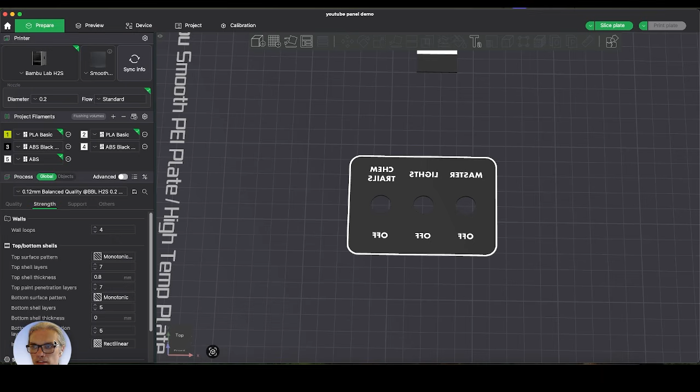The other thing you need to change - let me move my face out of the way - is we want the layers to print all the way through to be 100% infill. So we're going to come to strength and select 100%. Then it gives a warning about what grid pattern to put in, which I don't know why, because at 100% infill there's no grid pattern. So you just select yes to that.

Now, the neat thing about Bambu Studio is from the default profile, if you ever change anything and forget what you changed, it'll be colored orange - the tab is orange, and the thing you changed is also orange.

Perfect, so that's actually all we need to do for configuration settings for a Bambu printer. Now your printer is going to be different - you might not even have the same slicer, but good luck. I'm sure you can come up with a similar configuration from your printer to that printer slicer.

Another thing I didn't touch on, because we used the mouse pointer for everything, is if you select this objects tab, you can individually change the color of these objects. For example, body 10 is like one of the O's - you could click this and then change the color. That's another way of accessing the bodies - objects. They're bodies in Fusion, they're objects in Bambu Studio.

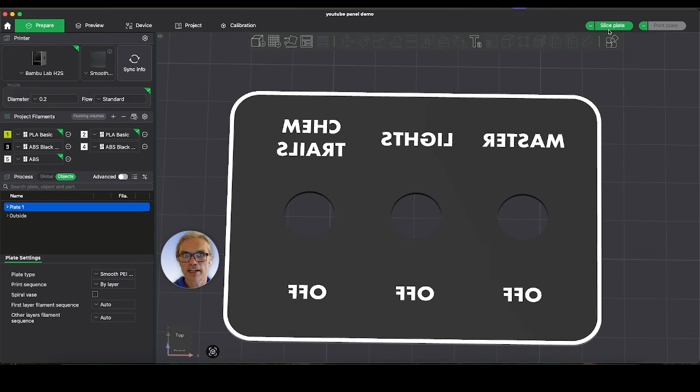So let's go ahead and click slice plate. What this does is the computer software comes up with a tool path for the 3D printer to lay down all these colors. The important thing to do within the preview pane - so we were over here in prepare, now we're in preview - is to make sure that white is printed first.

This is paramount to getting a good quality first layer print of your instrument panel label. If white prints first and it has a little bit of an issue, it's way less obvious than if black prints first and doesn't make a proper outline.

On the plate itself, we're going to zoom out. Oh, we must need to be in prepare. So on the tab on the upper left-hand side, there are settings on the plate, and on the lowest button, there's like a gear, a nut. We're going to click the nut.

We want to make sure that all layers print white first. Maybe it only matters for the first layer, but specifically we want white to always go first. So we're going to click from auto to customize.

From in here, you can drag your filaments around in different orders. So two could go first. In my case, one's going first, but I'm not using lime green. Okay, we'll do the same thing down here - you can drag these around.

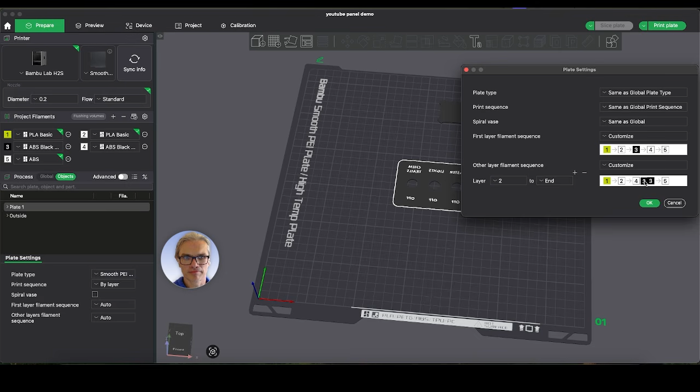Okay, maybe you gotta just hover over the... okay, I got you. Just drag these around to make sure that for your case, white goes first. Okay, I'm gonna hit cancel. All right, so preview.

And then from here, that's it. All you got to do is hit print plate and click go, and your printer will print you out a brand new label. I'm going to go ahead and kick this off, and I'll get back to you, and we'll see what our results are.

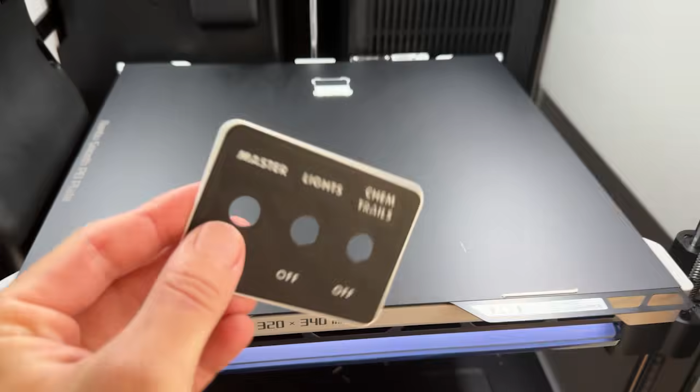Okay, so about an hour later, our 3D print finished. Let's see what we've got here. Oh man, that looks good.

Nice and smooth, not too much reflection. Everything looks nice, I don't see any issues. God dang, that looks good. I mean, you literally cannot feel it - it's like it was just printed into existence.

Man, I love it. Okay, so here we are about an hour later, and our print is finished. And my God, this thing looks so good. Nice and smooth, no texture, no bumps. Even the backside looks good, man. I think you could totally get away with printing this upside down - it's just not quite as perfect, you know?

So where do we go from here? Okay, in my case, the switch nut itself holds the label on. This goes through my instrument panel itself - I'm not changing that. But then this goes over to sandwich on the instrument panel, and the nut goes over this. The nut holds the instrument panel label.